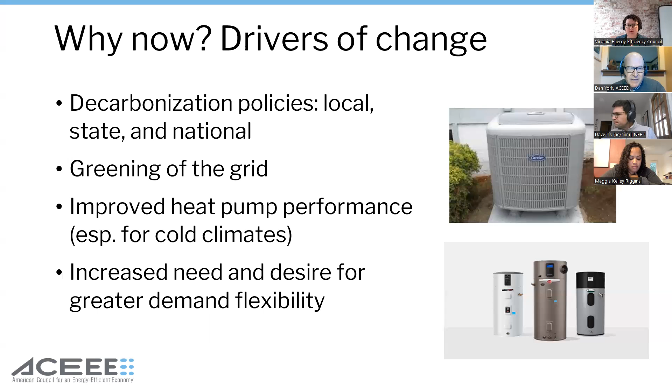And then a related demand is with the rapid rise of renewables on the grid and other distributed energy resources. We're seeing that there's really a need for greater demand flexibility, and more electrified technologies can provide that through load control and interaction with the grid.

But there are certainly barriers for switching to heat pumps for space heating and cooling. There's still high first costs, even if there are lower life cycle costs. People need to invest heavily up front to get these new systems, especially if they're retrofitting and making replacements ahead of end of life. So it is a big cost up front.

There's also problems with just home readiness, that for various reasons, electrical and other system upgrades may be needed to switch over to heat pump based systems. There's also customer preferences and unfamiliarity with this technology.

I'm based in Madison, Wisconsin, a cold climate, and we sort of have learned to love our natural gas furnaces and blowing out hot air - they're the old reliables. So replacing those, when we think of some of the polar vortices and things like that, kind of makes people a little hesitant to embrace a new technology.

And I know we'll be talking more about that cold weather performance and how that's really being overcome. There's also just the perceived risks. This relates to that hesitancy that we're just not 100% sure it's going to deliver when it really needs to, or it just flips over and is not so efficient and cheap.

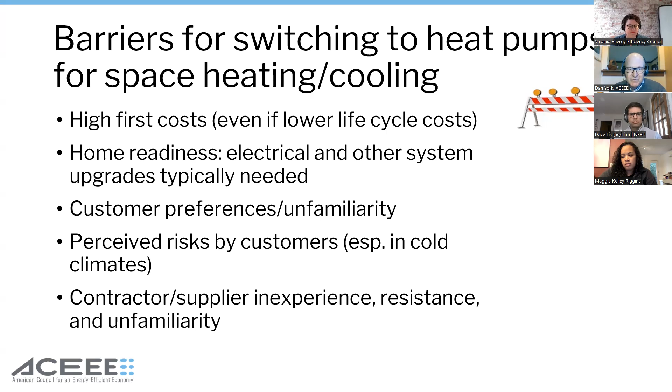And then related to that, contractors and suppliers in many cases aren't used to dealing with this technology, and they like the old reliables and avoiding callbacks from their customers, making sure they have warm or cool homes as needed.

And I even ran into that unfamiliarity problem just a couple years ago. I asked my contractor about a heat pump because my natural gas furnace is aging and getting there, and he just kind of looked at me with a cocked head and was going, 'Oh, really? Okay, I guess.' He was kind of surprised, and I did get a follow-up, but that's changing rapidly.

But there are certainly benefits to heat pumps and electrification for residents. There can be improved health and safety within the home. You don't have direct combustion sources and potential carbon monoxide and other hazards if it's electrified.

It can be improved comfort. I think some of the heat pump systems can provide greater versatility in keeping different parts of your home at the temperatures and indoor conditions that you prefer.

Can generally reduce energy costs. And again, these are life cycle costs, and we'll get to that in a minute, but it really depends on the climate, the energy costs, and the condition of the home and fuel costs.

Also, this became evident sadly last summer when we had the deadly heat waves in the Pacific Northwest, an area where many homes aren't air conditioned, and suddenly they were getting dangerous extreme temperatures. So providing air conditioning in places that traditionally haven't had that kind of cooling capability can be more important.

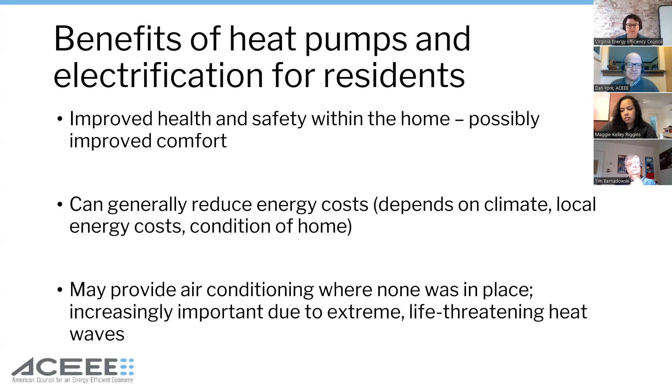And so now I'm just going to briefly touch on an ACEEE study that I didn't do, but some of my colleagues did. So I'm reporting on their results, and I'll give the link to the full report later for those more technical questions. It was taking residential energy consumption survey data and then doing all kinds of modeling.

They set up models at different types of homes in different climate zones, looked at equipment installed in the year 2030 at end of life. And here were some of the other assumptions used - accounting for increased costs for different fuels and things, and just calculating the life cycle costs.

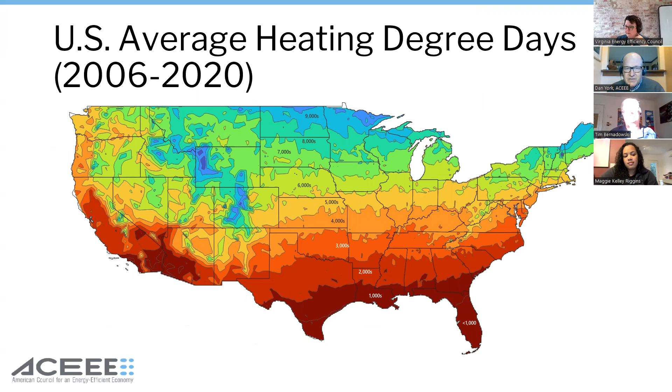And just as a reminder here, just to show that the US, we're talking many different climate zones, from the deep freeze of the very upper Midwest to much more tropical-like climates. So looking at heat pumps across all these different climate zones.

And this is the summary results, kind of whittled down to just a very small group here. The bottom axis is heating degree days, so as you go to the right, those are colder and colder temperatures. Just looking at the electric air source heat pumps, that's the red line that goes up.

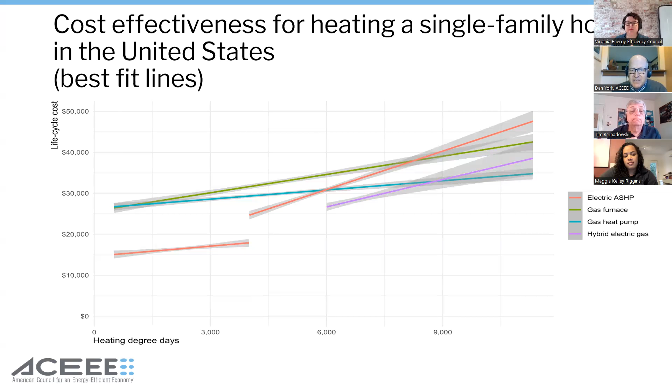So in really cold climates, if it's just all electric, the life cycle costs did wind up being the most expensive. But then if you look at the purple line there, hybrid electric gas, that's using heat pumps with some kind of fossil fuel or backup, or possibly wood. This is the summary results after all those thousands of modeled homes, for air source heat pump for space heating and cooling.

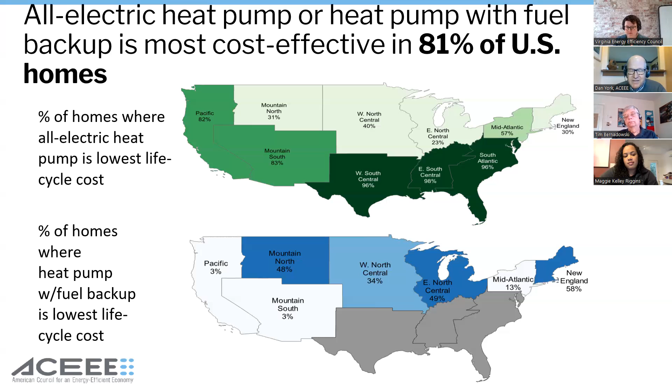And then as you go into the northern climates, those hybrid systems seem to be important to achieve cost effectiveness, but there's still plenty that also would be cost effective all electric. The full results of this report you can get later.

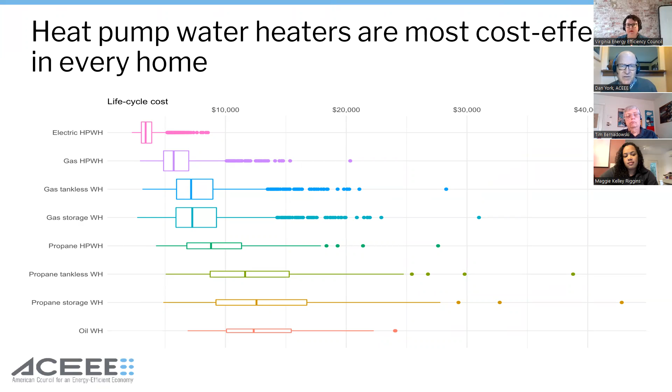And can't forget about heating water, so heat pump water heaters are shown to be cost effective pretty much everywhere. Whatever combination, whatever type and storage, there's a lot of different combinations there. So that's another technology that's increasing just along with the space heating and cooling.

Just a few things to wrap things up here. We don't want to forget the importance of energy efficiency to be packaged with heat pump conversions, that just like a lot of energy systems, if you reduce your load first, that allows you to possibly get a smaller unit and just overall improves the life cycle costs. So we want to do both, making sure you're adding efficient technologies to an efficient building.

Looking at how that energy efficiency could help alternative fuels better compete with some of the electric options, and helps electric heat pumps minimize the need for fuel backup. So that's another important outcome by improving the building envelope, so that you may not really need that fuel source backup.

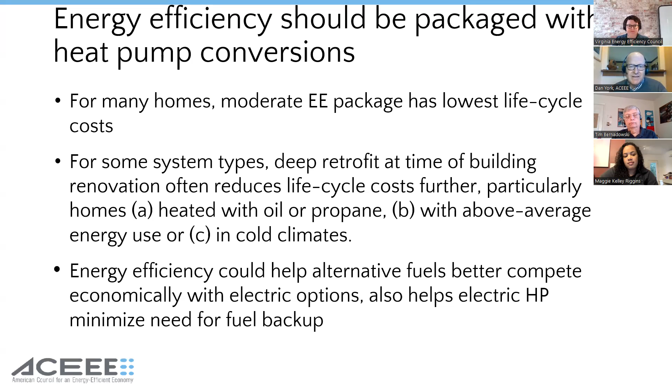Wrapping up, as a result of all these technologies and interest in electrification, states are really updating their program designs to go to big scale for energy efficiency and electrification. While not an exhaustive inventory of all programs, the work that ACEEE's done showed that in 2020 we counted just a little over $100 million in programs that were supporting heat pumps and electrification, and that's grown to 166 million. I'm sure that number underestimates the total. It's just all happening so fast.

The program design trends were encouraging weatherization to reduce loads alongside the new heat pumps. Some programs are offering pre-electrification or heat pump ready, in other words, getting at the envelope and making sure that's efficient before you add that load, make that change.

Targeting upstream incentives to contractors and distributors. Clearly that's really important since a lot of replacements of heating systems tend to be done at failure. So people aren't going to wait for supply to be delivered and whatever delays that would really be a serious problem for them. So having that technology on trucks and ready to install is important.

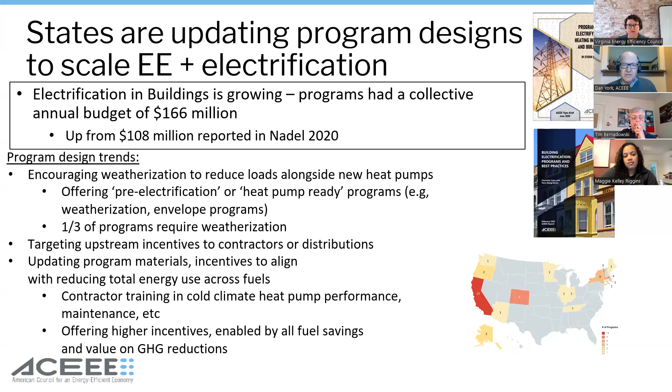I think this wraps things up. Again, this was a brief overview of what we see nationally, where things seem to be headed. Here are some specific research reports available from ACEEE. That top one is about programs and best practices, and then that modeling exercise. So a lot of information, and ACEEE isn't certainly the only place to get some good information. There's a lot out there now.

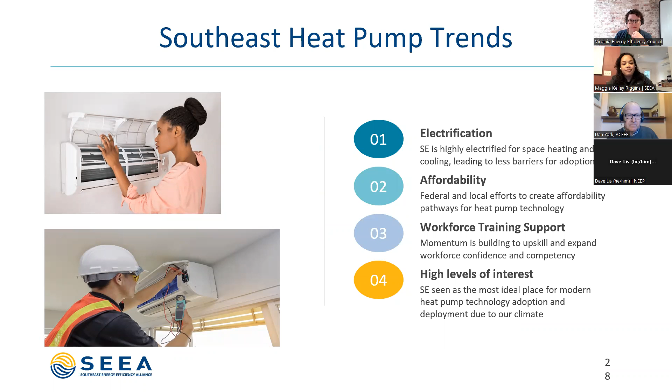Oh, don't know what happened. There we go. Animation is a fun thing.

So these are challenges and opportunities for heat pumps, specifically in the Southeast. But I think as you've heard, they really do span the country. What I'll say is I'll try to give some Southeast flavor.

So we'll start with the regulatory environment. I know Dave alluded to particular incentives or regulatory programs that come out of energy efficiency programs, whether at the state or utility level. There are a lot of regulation barriers in the Southeast for incentives and programs from utilities and government entities. In several states, the public service commissions have created specific rules and processes for utilities, investor-owned utilities in particular, to create incentives.

When we think about our regulatory environment, there are quite a few utilities who would love to do another heat pump incentive, create more electrons for their own service territory, but the incentive structure and regulatory environment is not as open and kind to air source heat pumps as it would be, for instance, to heat pump water heaters, which you can find incentives for at almost every investor-owned utility in the Southeast.

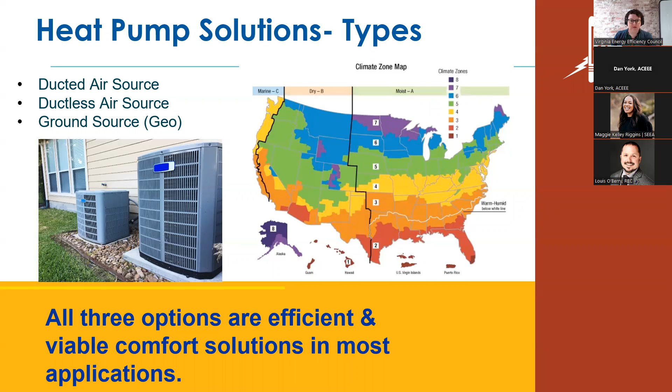So some advantages of heat pumps. There's an onslaught - we could put together multiple slides of advantages of heat pumps. But I'll just name a few that are right off the cuff and top of mind. One of the main advantages is that our climate zone is a great opportunity and a great demographic for heat pump implementation. And if we look at it compared to other sources of heat, even electric resistive down through fossil fuel...

Units of heat delivered per unit of energy consumed is much larger. Looking at that as a whole, a lot of heat pumps can give us up to 4 units of heat for 1 unit of energy. When we look at electric resistive heat as it compares to heat pumps, they're an honest 50% more efficient at heating the space. Electric resistive heat is about equivalent to about $3.20 a gallon of propane if we look at LP fuel at 100% AFUE. So even looking at some of your higher cost heating solutions, heat pumps are going to give you more heat for the dollar.

Huge advantage there. They're safe to operate, simple to maintain. You don't have as many operating components, not quite as much maintenance involved compared with some fossil fuel appliances such as oil or gas that require a little bit more intricate maintenance to keep them operating cleanly, effectively, and efficiently. So they're a little bit more simple to maintain. They still require maintenance, still require at least an annual visit to make sure everything is working as it should, but a few less components, a little less to go wrong, and they're a little simpler to maintain.

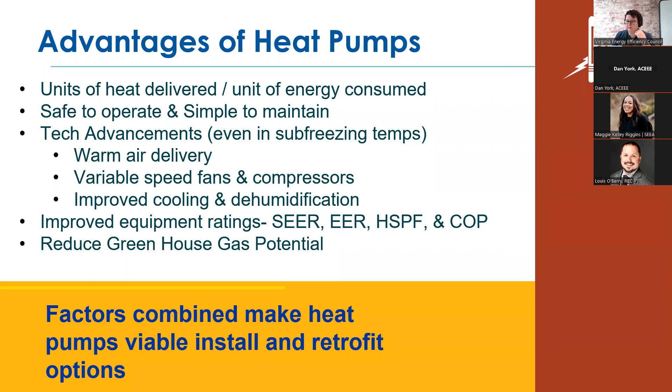And within our territory, we see heat pump installation on a very regular basis in new construction. I think we've done a good job over the years with code advancement in Virginia, promoting the use of heat pumps in new construction applications. I think we're doing a pretty good job there. If there's any meat on the bone, it's in places where we need to look at retrofit options—that would be the place to spend a little more time on.

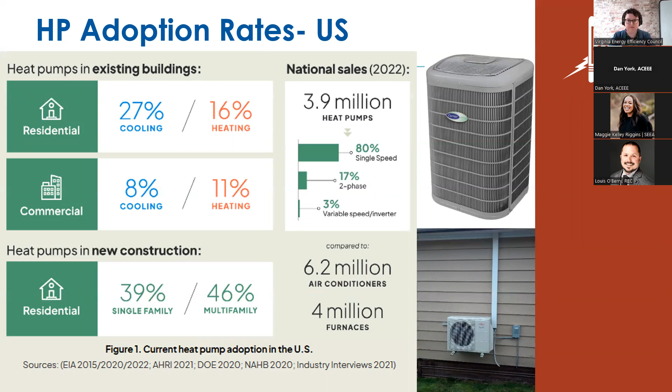Although the numbers are increasing when it comes to heat pump adoption in the U.S., retrofits in existing homes and buildings is definitely an area of improvement. Next slide.

So heat pump adoption rates as far as REC is concerned—every other year we conduct an energy efficiency survey in collaboration with our generation and transmission cooperative, ODEC, and through that information we've compiled some very strong data that gives us a perspective of what our adoption rates look like at a utility level. I think that was the primary reason for me to come speak with you, to give you a perspective of what it looks like within our demographic within Virginia.

So when it comes to cooling systems, 54% of our members say that they use the electric heat pump as their primary cooling system, with 41% being electric central AC with something else. It could be electric resistive heat, it could be coupled with a fossil fuel appliance of sorts, or it may be window AC with a furnace. So central ACs are still pretty predominant, but also, as you can see, our heat pump adoption rate is pretty strong throughout our territory.

Geothermal or ground source heat pumps are a smaller percentage of that, and we see most of those installed in homes built in the last 10 to 15 years or so. So it's kind of a niche market, if you will. The tax credits drove those sales, and typically we see that in our area in new construction, not quite as much in the retrofit market, but it still exists. There are still homes out there that will convert from air source to ground source heat pumps as well.

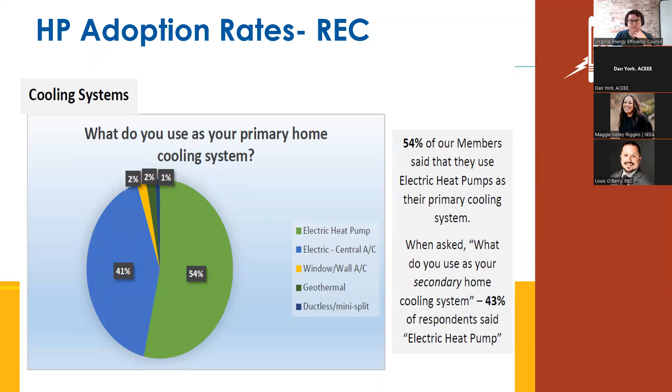There are other systems still in use within our territory, but also it's a variety of housing stock—it may be a portion that's modular or mobile homes with a combination of either fossil fuel with air conditioning or electric resistive heat with air conditioning. So there's definitely some opportunity out there, and there are also some barriers for some of those homes to actually retrofit heat pumps. We'll talk about a few of those in a moment.

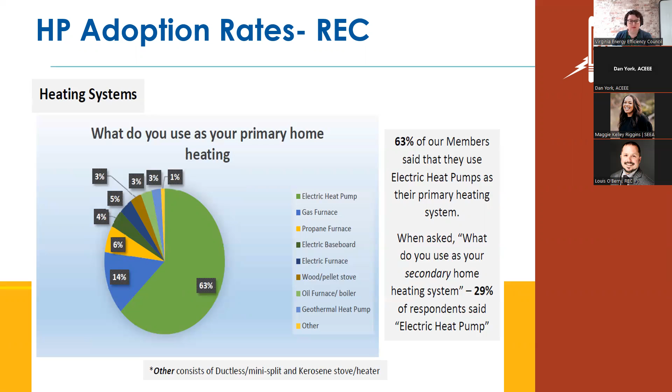When we ask questions like what do you use as your secondary heating system, 29% of those folks said they have an all-electric heat pump. Portions of our territory closer to municipalities and suburban areas do have mixed fuels, whether it be natural gas or LP, for at least one of those systems. In some multi-zone houses, the upstairs system is typically an all-electric heat pump, while downstairs is either a combined fossil fuel hybrid approach or a fossil fuel appliance with a straight air conditioner. I won't go over the pie chart in huge detail, but as you can see, the adoption rate for all-electric heat pumps within our territory is pretty strong at 63%.

Next slide. So just some barriers at a glance—and I know previously we discussed a lot of these—they surround both industry standards, manufacturers, and everybody involved in making heat pumps more accessible and easier to install and retrofit. Some of the barriers include retrofit costs.

We've got some solutions to that. With the IRA funding coming down the line, that's definitely going to open up some additional rebates and incentives and reduce those barriers for all of our residential rate class when it comes to retrofitting. But there's still a large upfront cost, right? So even on retrofits where they're moving away from an appliance that may be costing them more to utilize for heating, and trying to present a solution, there may be other things that need to be done, right?

The existing equipment and duct conditions in the home—homes that had older fossil fuel systems are typically not suitable for heat pump airflow, and it involves an additional retrofit cost to get those equipment and ducts up to snuff. That requires our contractors to do sound engineering, providing good equipment specifications, utilizing Manual J, D, and S for proper sizing, and reworking the existing ductwork or installing new ductwork if needed in some of these homes. For some, that's a barrier, and primarily it could be cost.